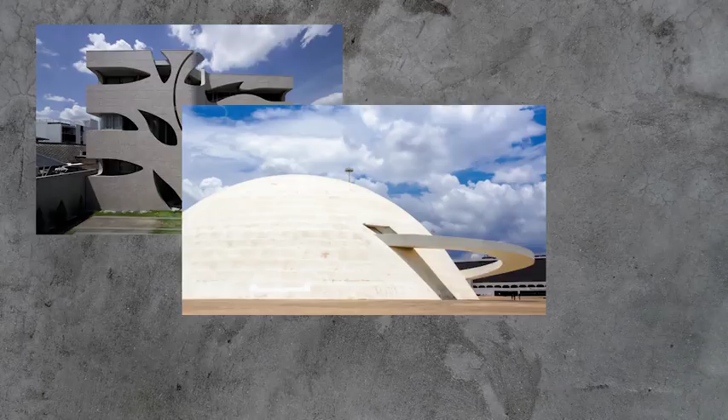Many of the world's famous structures are made of concrete. Concrete is the most consumed building material and the second most consumed material in the world after water. It offers the construction industry with characteristic properties such as high compressive strength, versatility, non-combustibility, and high durability.

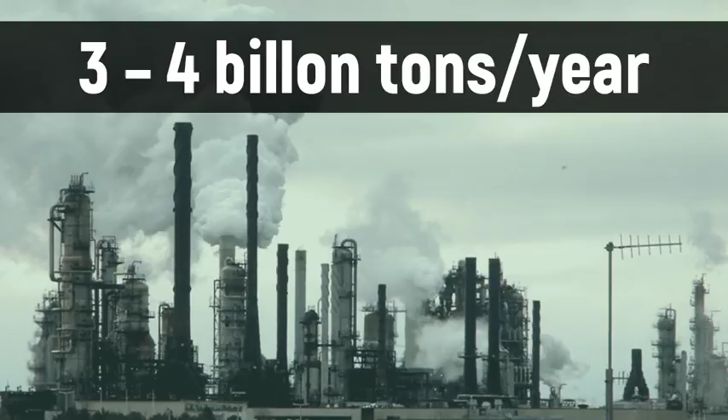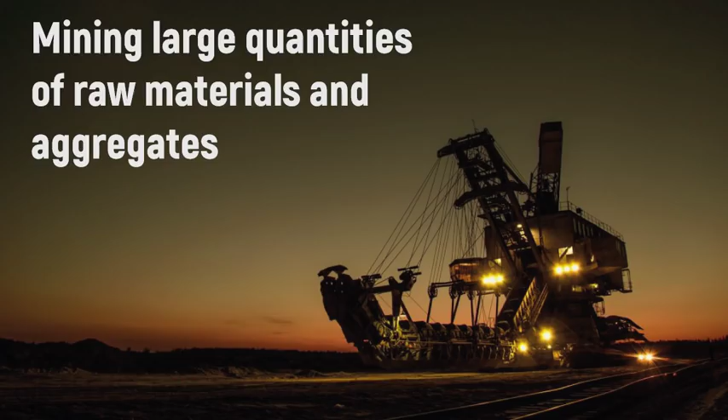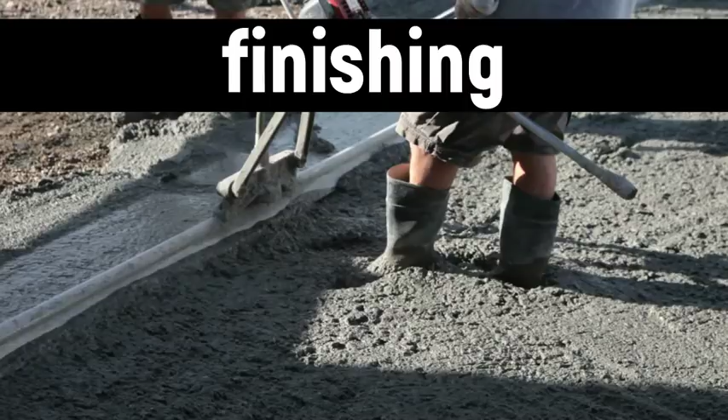Mining large quantities of raw materials and aggregates often results in extensive deforestation and topsoil loss, and adversely affect the ecology of forested areas and riverbeds. Additional environmental strain is due to numerous chemical and mineral admixtures, which need huge inputs of energy and materials into the final product. Also, batching, mixing, transport, placement, consolidation, and finishing of concrete operations are energy-intensive, wherein fossil fuels are the primary source of energy.

So now, how to address these concerns? First is to reduce the consumption of concrete by developing innovative structural design and using highly durable materials. The carbon dioxide from the calcination in clinker production could potentially be reduced by using carbon capture and storage. Also, the carbon dioxide from combustion of fuels could be reduced by improving the energy efficiency of the production process by using bio-based fuel. Another would be use of supplementary cementitious materials and superplasticizer. And last would be the use of alkali-activated cement and use of recycled aggregates.

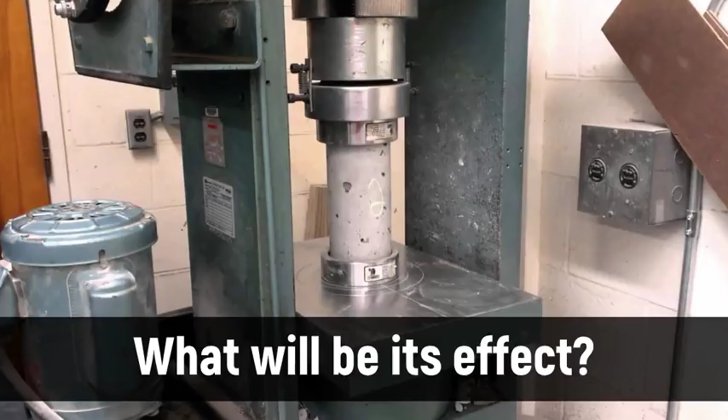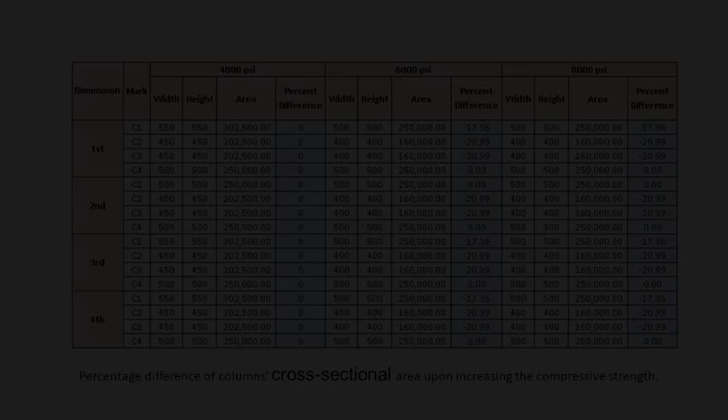But, what else can be done? That is what we will explore in our study. We will look at the effects of increasing the concrete compressive strength as applied to a reinforced concrete structural frame of a 4-story building. Using 4,000, 6,000, and 8,000 psi concrete, the study results to a design with reduced column and beam dimensions. The table shows the percentage difference of columns cross-sectional area upon increasing the compressive strength. And the table shows the percentage difference of beams cross-sectional area upon increasing the compressive strength.

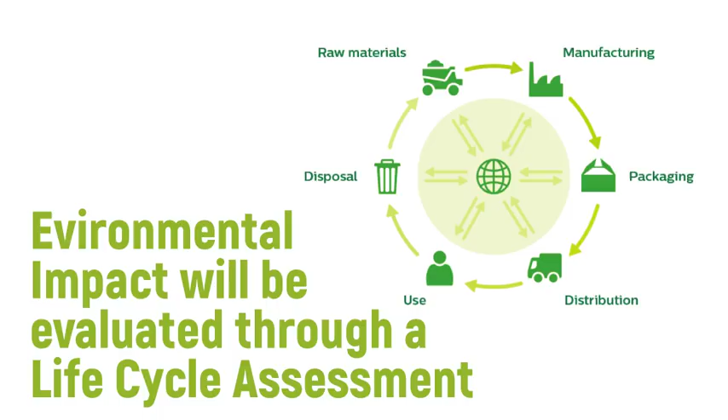Now let us check for the environmental impact on the global warming potential characterized by CO2 and ozone depletion potential characterized by CFC11. Also, how the increase in compressive strength influences the cost. Environmental impact will be evaluated through a life cycle assessment. LCA is a systems analysis tool for evaluating environmental impact of a product or service during the whole life cycle, from raw material acquisition to final disposal as per ISO 14040. SimaPro, the most widely used among the LCA software, will be used to aid in the evaluation. A cradle-to-gate approach will be used, that is, material manufacturing and construction including transport.

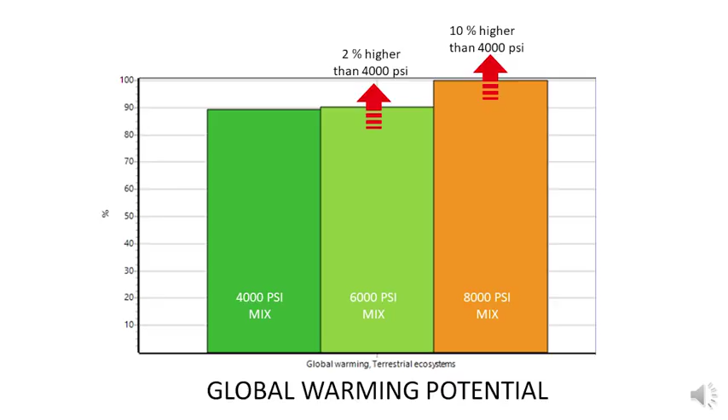And now for the results. The evaluation for the global warming potential gives an increasing trend with the increasing concrete compressive strength. The bigger difference is between 6,000 psi and 8,000 psi. Very little difference is observed between 4,000 psi and 6,000 psi. As for the ozone depletion potential, the evaluation shows a decrease for both the 6,000 psi and 8,000 psi compared to the 4,000 psi. The bigger difference is between 4,000 psi and 6,000 psi. Very little difference is observed between 6,000 psi and 8,000 psi.

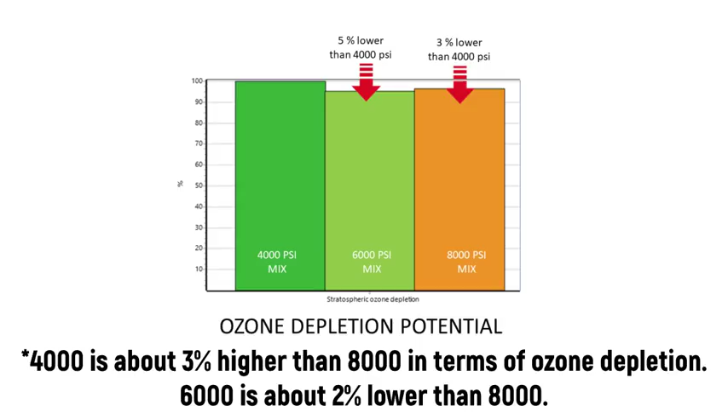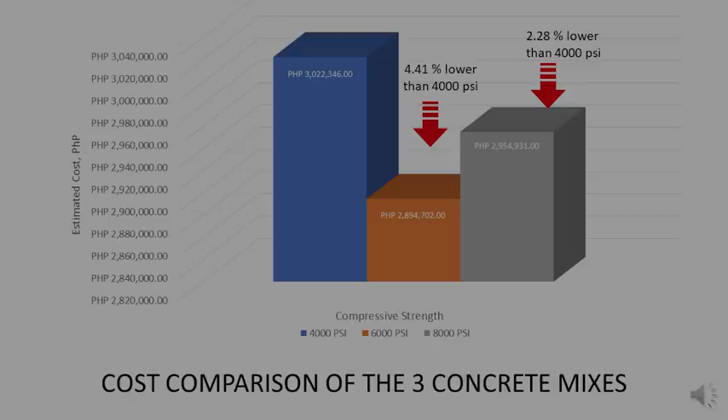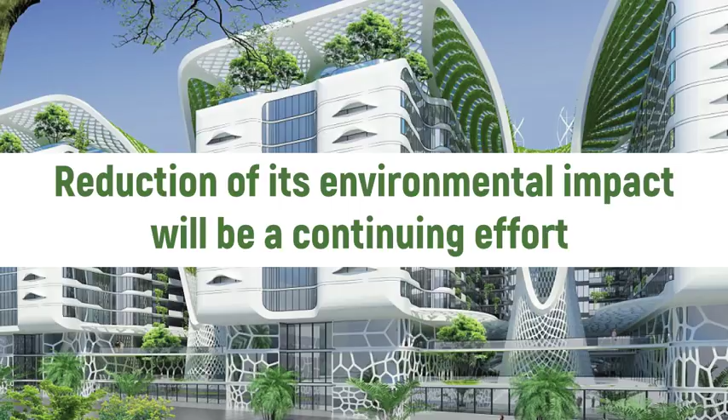In terms of the estimated cost for the structural frame, the 6,000 psi and 8,000 psi are both lower than the 4,000 psi, with the 6,000 psi the lowest of the three. The use of concrete is inevitable in the future. Reduction of its environmental impact will be a continuing effort for a sustainable development. Further study is needed to meet a growing need for more concrete without compromising the environment.